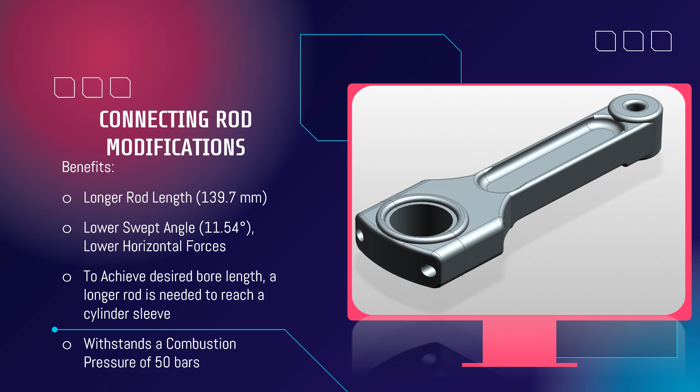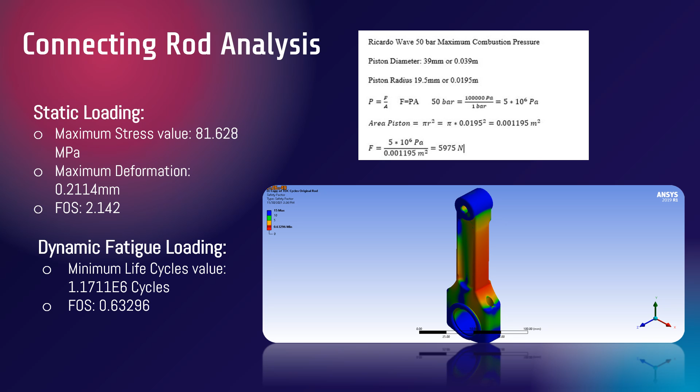For the connecting rod ANSYS analysis, a static loading and dynamic fatigue loading analysis was performed. On the static loading, we have the following values: maximum stress of 81.6 megapascals, maximum deformation of 0.2 millimeters, and a factor of safety of 2.142, which is excellent. For the fatigue loading, it has a cycle count of 1.17 times 10 to the 6 and a factor of safety of 0.63, which is perfectly fine for the cycles and stress that our engine will endure.

Hi, my name is Carlos Rodriguez. I will be explaining the engine's jig and gasket design. The purpose of these designs is to reduce the piston bore to 39 millimeters to fit our selected piston. In addition, the distance created by the space between both parts makes it possible to use our elongated connecting rod system. As a result, the total distance between the two parts is equal to 58.45 millimeters.

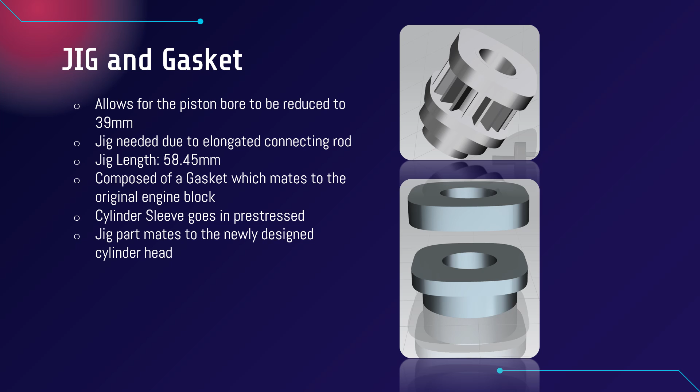The assembly is composed of the gasket, which mates to the original engine block, and the jig part, which mates to the newly designed cylinder head. Heat transfer was considered, and a design of various fins for heat dissipation was developed.

Greetings, my name is Juan Núñez and I'll be talking about the engine's internal combustion. A process called material balances was used in order to calculate the fuel and air mass fractions of the entire combustion reaction. These mass fractions were used to complete the fuel composition label at the Ricardo Wave software with the goal of obtaining more accurate graphs of indicated specific fuel consumption and brake specific fuel consumption.

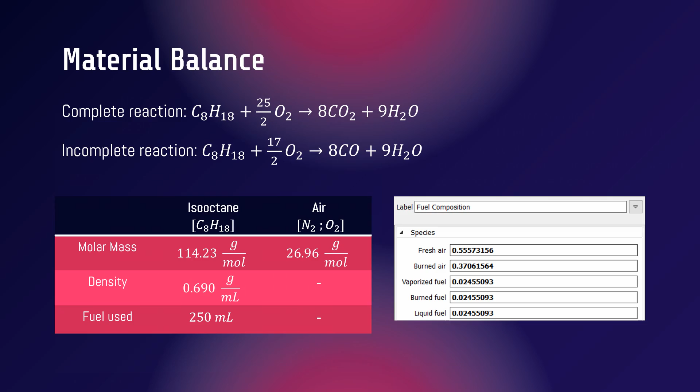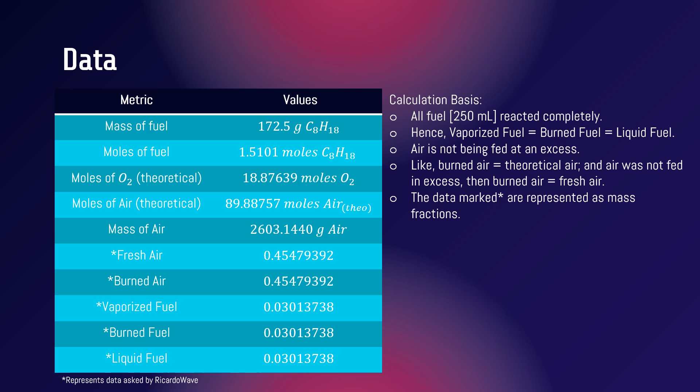The calculation bases used for this analysis were the following: all fuel reacted completely, and because of this, the vaporized fuel, the burnt fuel, and the liquid fuel had the same mass fractions. Air was not being fed in excess. Since burnt air is the theoretical air that reacts with the fuel, this would mean that burnt air and fresh air also had the same mass fractions. The numerical results of the material balances are displayed in this table.

In order to know the energy released from the combustion reaction, we need to calculate the heat of reaction of the combustion process. The heat of reaction of isooctane is 5,461 kilojoules per mole at 25 degrees Celsius.

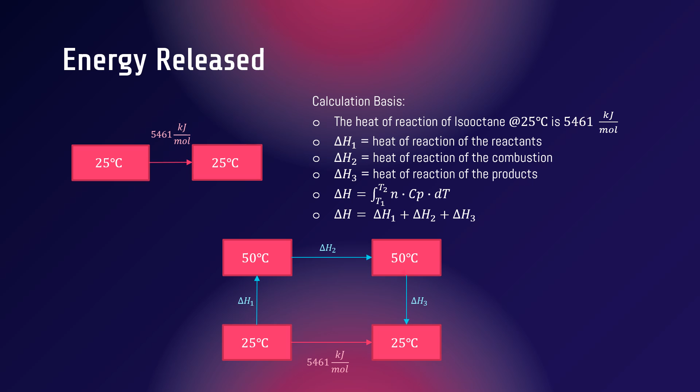25 degrees Celsius is not our desired temperature, but because the heat of reaction is a state function, we can alter the path using our desired temperature to calculate our desired heat of reaction, which in this case is delta H2. As shown in the diagram, delta H1 represents the heat of reaction of the reactants, and delta H3 represents the heat of reaction of the products. We need to calculate both of them in order to solve for delta H2.

The values at the data table are already given to us, and using this we can calculate the heat of reaction of each species in the reaction. Delta H1 is calculated by adding up the heat of reaction of the species present in the reactants, and the same is done for delta H3 but using the products.

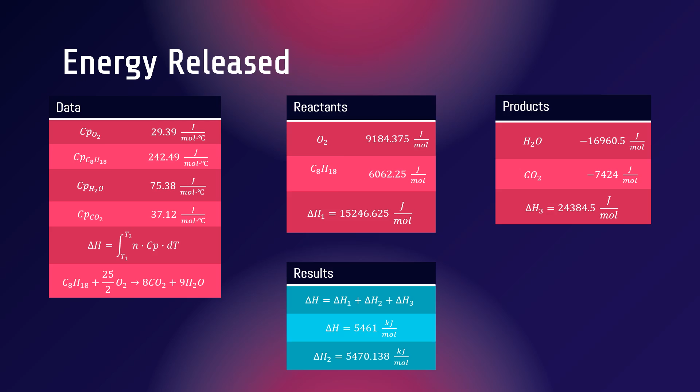Finally, we can solve for delta H2, and that will be the energy released from the combustion reaction. Hello, my name is Ricardo Bocachica, and I will be presenting the intake and exhaust manifolds and the performance curves of the engine.

For the manifolds, the intake design will have a throttle system, and it will be facing the coolest area of the engine. For the exhaust design, it will be facing the back of the car, and it will have an isolator to prevent vibrations on the chassis.

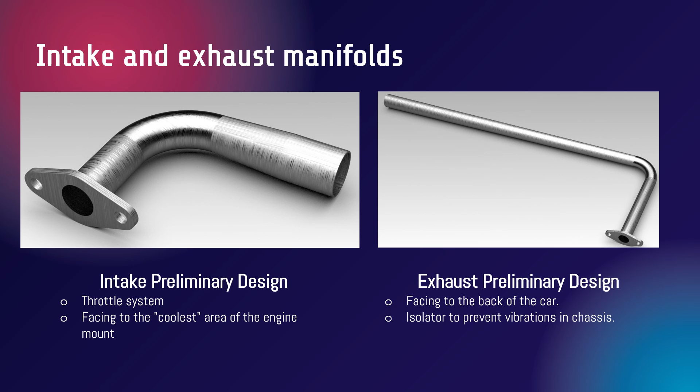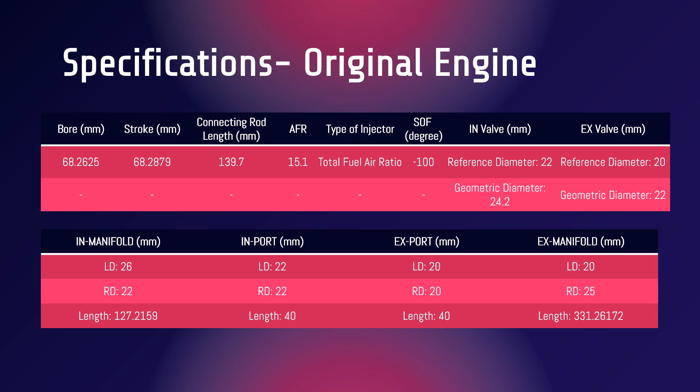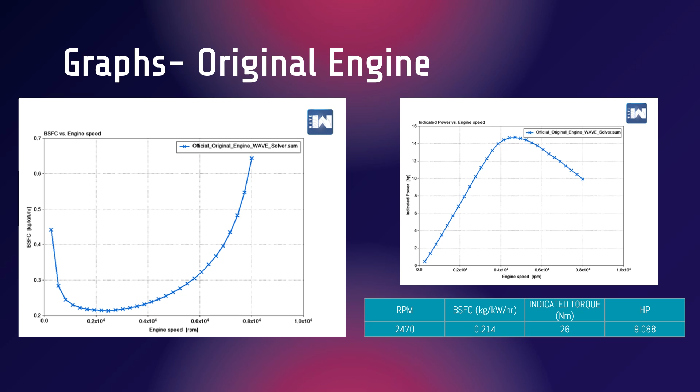Moving to the performance of the engine, here we have some parameters of the simulation in Ricardo Wave of the original engine. With the parameters, we identified the brake-specific fuel consumption, torque, and power graphs, and since the lowest value of brake-specific fuel consumption marks the efficiency, a relation was made between all the graphs, and an efficiency point was found in the indicated RPM with the indicated values shown in the table.

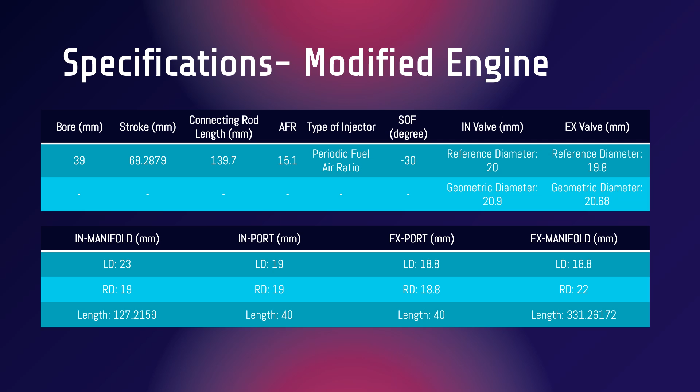Now here we have the specifications of the simulation Ricardo Wave of the modified engine. We had a problem with the simulation since the peak torque and peak power could not be identified because the program does not identify the small bore that we have. However, the efficiency point is defined in the brake-specific fuel consumption, and the same relation can be done, obtaining in the indicated RPM the values mentioned in the table. It is important to mention that these are theoretical graphs of the engine based on Ricardo Wave, so they will be compared with graphs obtained in the dynamometer in the future.

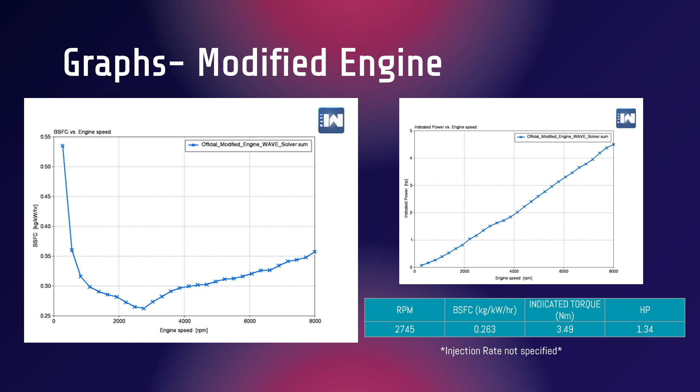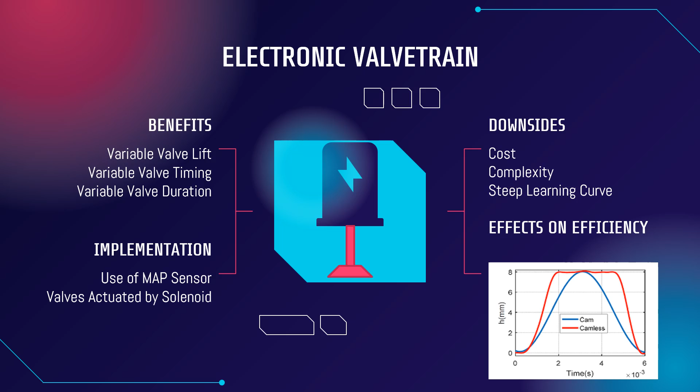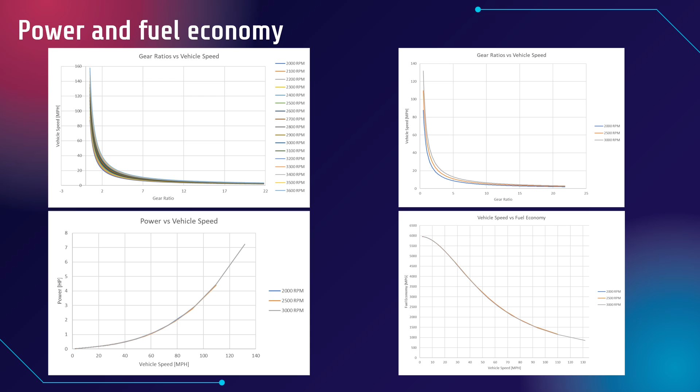To obtain the vehicle's train and power and fuel economy, certain calculations were made, and an efficiency including transmission of 0.51% was obtained, a drag coefficient of 0.1, a frontal area of 0.16 square meters, and a vehicle weight of 226 pounds. With a top speed of 25 miles per hour, which is where the most fuel is used, and 2500 RPM, where the maximum efficiency and torque is found. A power output of 0.23 horsepower and 4,919.7 miles per gallon was obtained.

Due to the desired reduction in displacement of the engine, a sleeve that will be inserted inside the original cylinder was designed. This sleeve is a 43% bore reduction, which would result in a 76% displacement reduction, from 204cc to 70cc. This sleeve would also be made of aluminum and have fins added for heat dissipation and structural support.

With this new bore, the cylinder head had to be redesigned. Originally, we bought one with the required bore, but it was too large and had too many components, so we opted for making our own to tackle these problems.

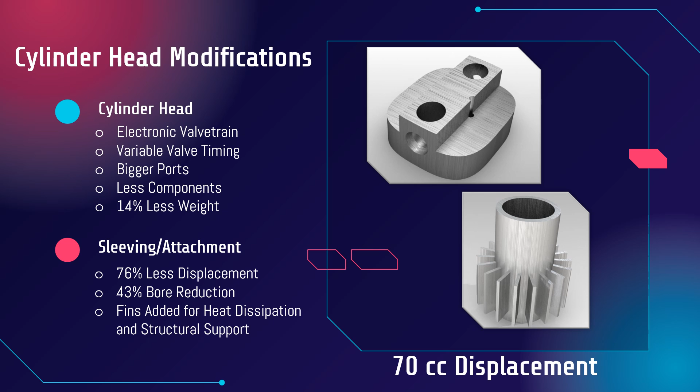We are going to implement an electronic valve train design which will allow variable valve timing, and having control over the internal head structure allowed us to implement bigger ports adjusted to fit our needs for the desired air-fuel ratio. By being electronic, many mechanical elements are discarded, resulting in lower system inertia and less losses due to friction, along with a reduced weight.

And here is a CAD of the resulting modified engine, where the implementation of the cylinder sleeve, jig, cylinder head, intake, and exhaust can be seen attached to the motor.

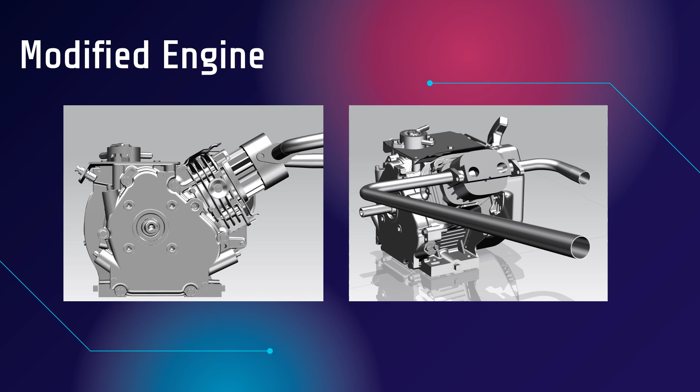The engine control unit, referred to as the brain, is divided into two main computing units, the Arduino Uno and the Raspberry Pi. The sensors listed here connect directly to the Arduino Uno, which then sends the data to the Raspberry Pi.

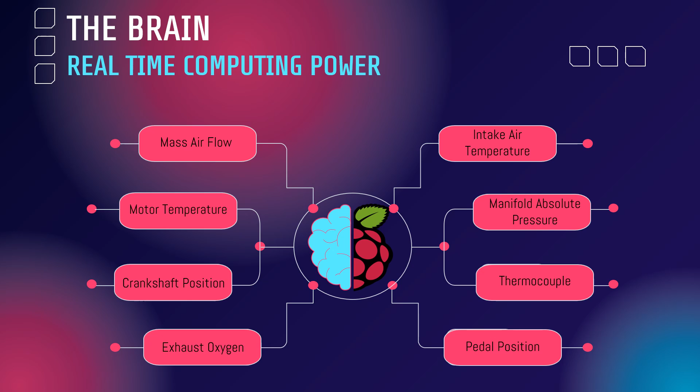The Arduino Uno is in charge of collecting the data from all the sensors and converting some sensors' data from analog signals to digital signals, to then send to the Raspberry Pi. The Raspberry Pi, in turn, uses the acquired data to manage the different systems of the engine. Also, the telemetry data that will be displayed in the cockpit is transmitted directly from the Arduino.

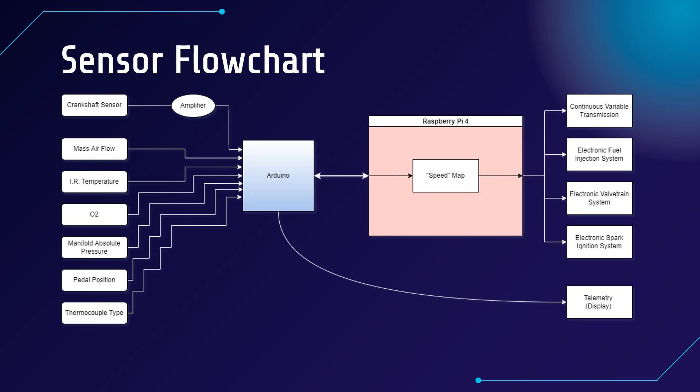Something to note is the speed map inside of the Raspberry Pi. Think of this as a fuel map, but for the speed of the car. The speed map receives inputs from the accelerator pedal and the vehicle speed to control the engine's RPMs and the CVT's gearing.

This graph shows the center of mass of our car calculated based on the weights of the different components, including the weight of the driver, which is around 135 pounds, the weight of the engine, and the weight of the shell, which do not appear in the image. The center of mass is 810.2 millimeters from the front tire axis and 323.94 millimeters from the ground.

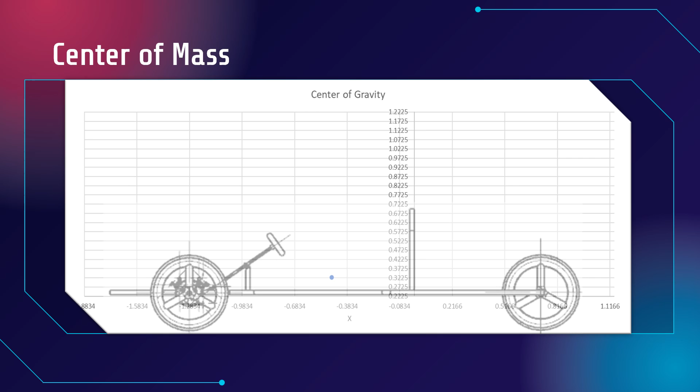It is not a requirement of this competition to lock all tires during peak braking. For this reason and for their lightweight, hydraulic disc brakes are going to be used. However, it is important to decide which type of calipers are used, either 2 or 4 piston calipers. Because of this, the capacity of this type of brakes to produce deceleration has to be analyzed. And this equation was derived by summing moments with respect to the frontal wheel axle.

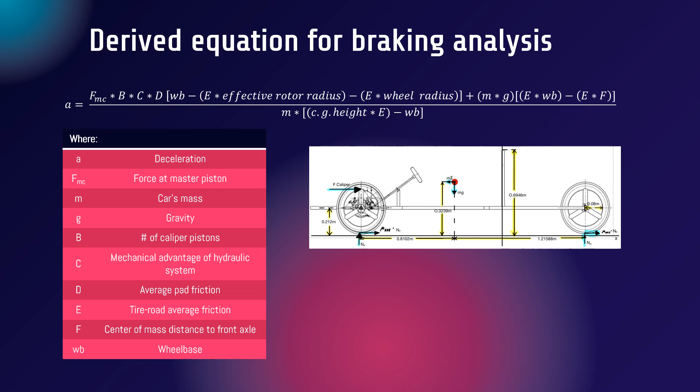Assuming all tires lock during caliper engagement is not practical because bicycle calipers are not that powerful. The transition from dynamic friction to static friction will vary depending on the decreasing velocity. But as soon as the calipers lock the disc, the tires experience friction, which will contribute an additional torque that the calipers have to sustain.

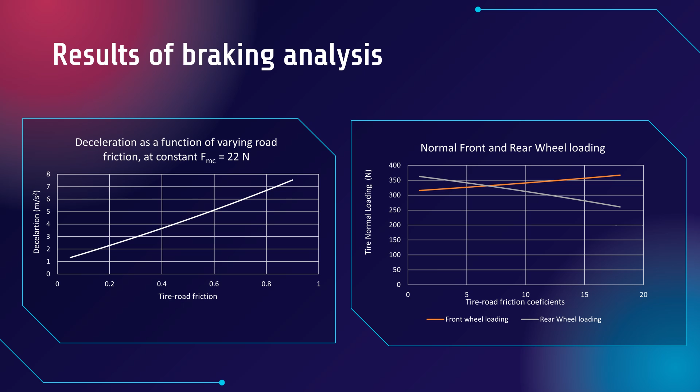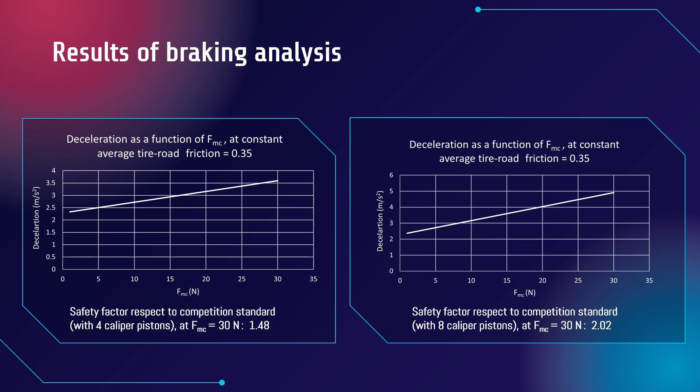Based on the distance between the steering joints and the wheelbase, we were able to calculate the Ackermann steering angle, obtaining 6.63 degrees. In addition, with other parameters considered, such as the maximum turn radius, we calculated the inner and outer wheel maximum steering angles. This result gave us 7.84 as the inner wheel maximum steering angle and 7.46 as the outer one. These pose as our ideal steering angles with the respect of the radius of the curvature.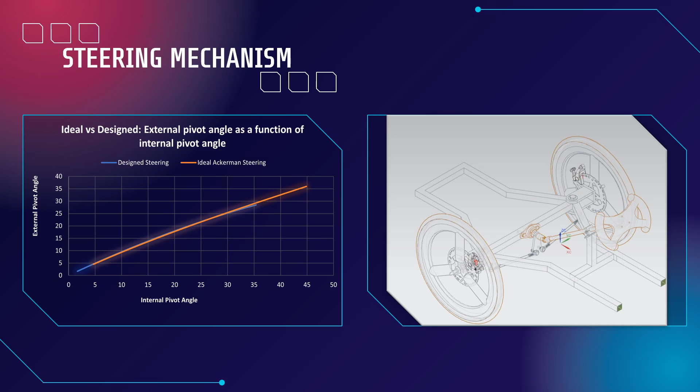Also, we wanted to analyze the maneuverability performance of the car during this slalom course. A sine function was used to model the lateral displacement oscillation. Given the time traversed two full cycles of curves, angular frequency was obtained and max lateral displacement was assigned to be the amplitude of the sine function. The parametrical equations were then put together to establish a relationship of lateral displacement with respect to forward displacement, and this way, the radius of curvature at any point could be obtained.

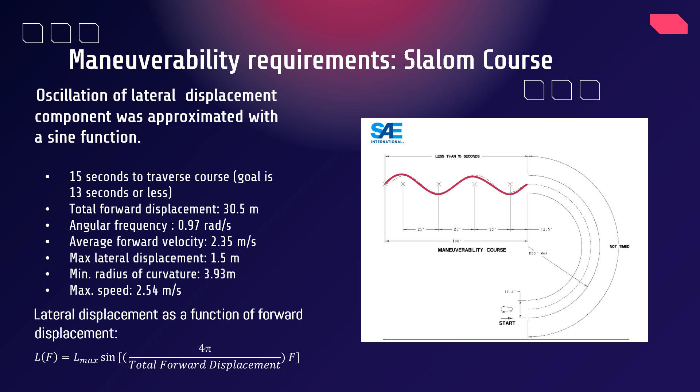With the pre-established kinematic parameters, then a dynamic analysis was performed. The centripetal acceleration was calculated using the max possible speed during this testing trial and the smallest radius of curvature. We wanted to analyze how the normal force is distributed given our car's geometry during performance.

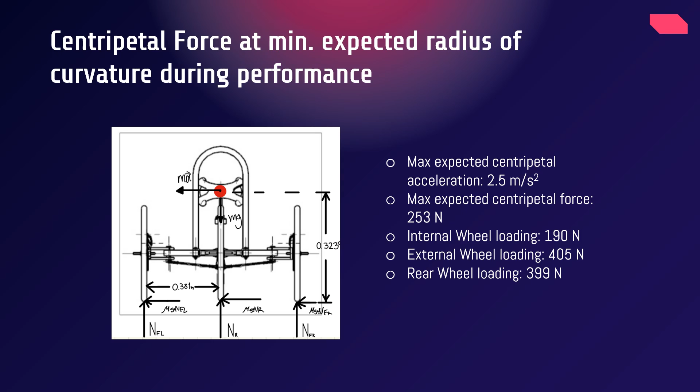In order to minimize the weight of the shell without compromising its structural integrity, we'll be using this formula. These proportions allow a 1.2 millimeter shell body to be designed using two layers of 2x2 woven e-glass cloth of approximately 100 grams per square meter each, contributing to 0.3 millimeters of thickness. The shell body currently is designed to have approximately 5.45 square meters.

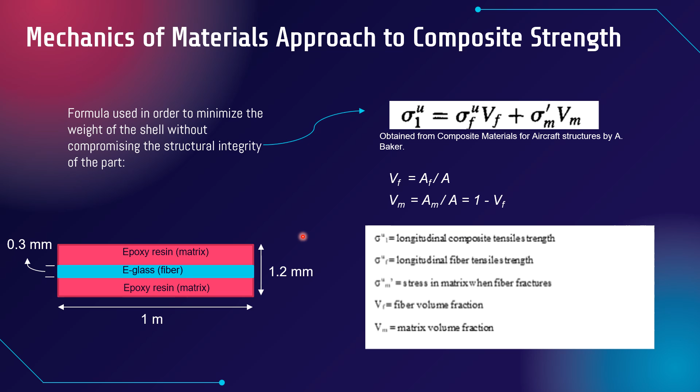Here we have different tables. The first is the approximate weight of the proposed shell design. The second is the different mechanical properties for each of the fiber types. The third is the current mechanical properties of this specific epoxy infusion resin, which has great tensile strength. With the 25 to 75 proportion of fiber to epoxy, using the equation before, it provides a result for a unidirectional composite, meaning the fibers all go in the same direction. The approximate tensile strength achieved will be around 540 megapascals in the direction of the fiber.

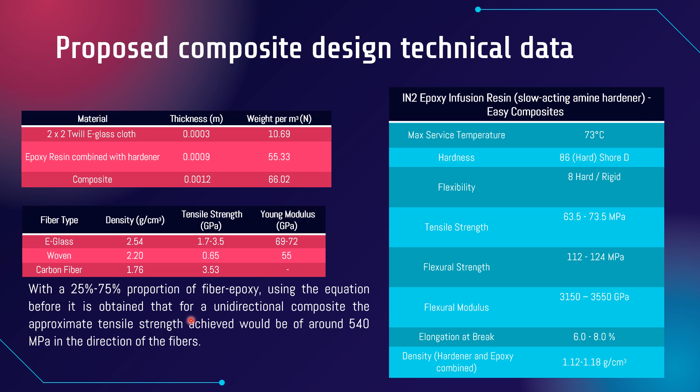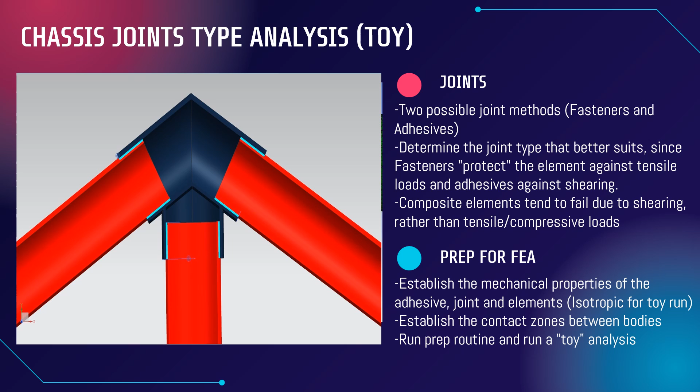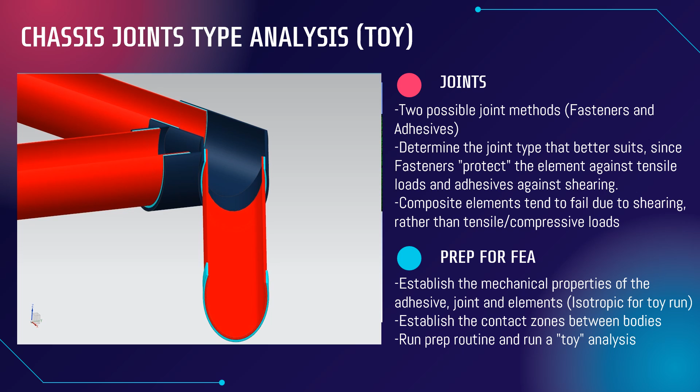For the analysis of our chassis, we have decided to go with an adhesively bonded joint instead of fasteners. This is because our composite beams are more prone to failure by shearing, which is mitigated by using an adhesive instead of a fastener. To prep for the analysis, it is important to set the tolerances and identify the contact and target bodies correctly to mitigate overlapping errors.

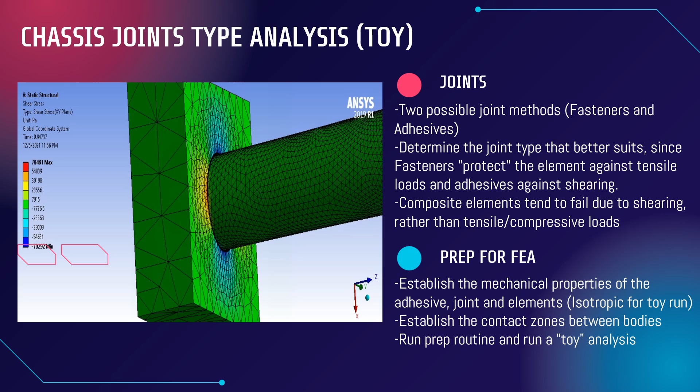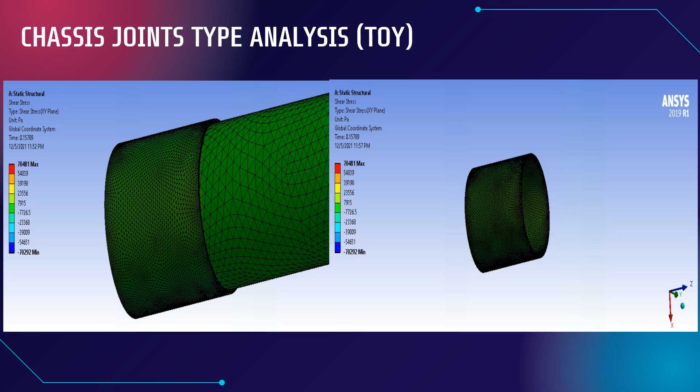As you can see in this adhesive bonding toy simulation, it is done correctly and successfully withstands the loading on the composite member. The stress concentrations are generated on the adhesive body. In this image, the adhesive body shows the highest shear stress concentration of the whole joint structure, which leads to the conclusion that the analysis setup is done correctly and aligns with the theory behind it without any discrepancies.

To model our composite members, we use the ACP Module within ANSYS Workbench, in which after adding the mechanical properties in the Engineering Data tab, you are able to assign the orientation, layup, and thickness of your composite to a surface body within your assembly or work part. This enables you to experiment with different layups and put to trial manufactured products from different manufacturers based on their safety data sheets, and pick the one most convenient for your application.

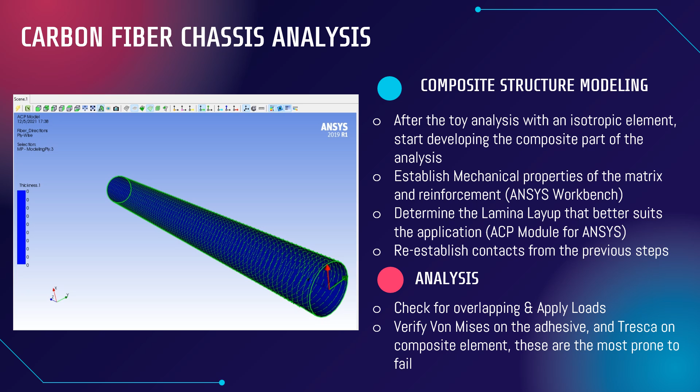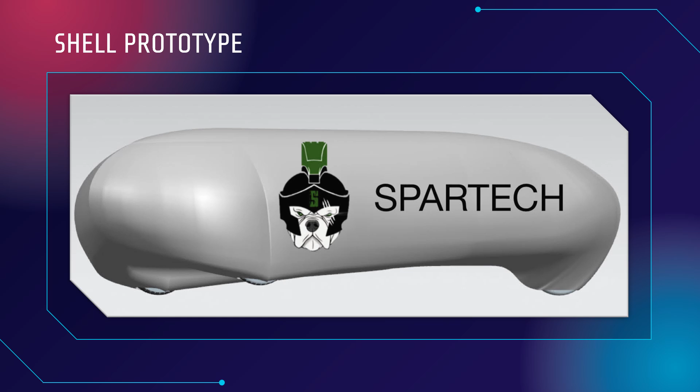In this image, you can see a prototype of the shell. So far it is not a final design, but it's more or less the idea we have. As you can see, the wheels are completely covered by the shell, and we are looking for a way to make the shell as slim as possible in the front part, for performance and aerodynamics reasons. Although this aerodynamic factor does not have such a significant effect, since the speed at which the car travels is only 25 miles per hour at maximum.

During the semester, fundraising sales made by the logistics teams have mostly been in-person. From those, we have a net gain of $2,048. Unfortunately, we did not reach our objective by 2%, but new strategies are on the go.

Our social media outreach has been via Facebook, Instagram, and recently LinkedIn. Posts regarding sales, recruitment, sponsor promotions, and team members' exposure have been done weekly. Statistics report that countries outside of the island have visited our pages, which gives us opportunity for greater exposure.

We are grateful to the companies that have helped us this semester. Their donations have provided us with materials and components to make next semester's manufacturing possible.

We have noticed a great improvement in our members' technical capabilities throughout this semester. Therefore, the team administration has established a new goal: we would like to take our team a step further next year by opening a second team to participate in the Shell Eco Marathon Urban Class Competition, which is basically a super mileage competition, but the actual design of the vehicle should resemble a road-going car with its features and looks, further complicating the technical constraints. We know there is the talent to carry on this task, so if anyone is up for it, scan the QR code on the next slide.